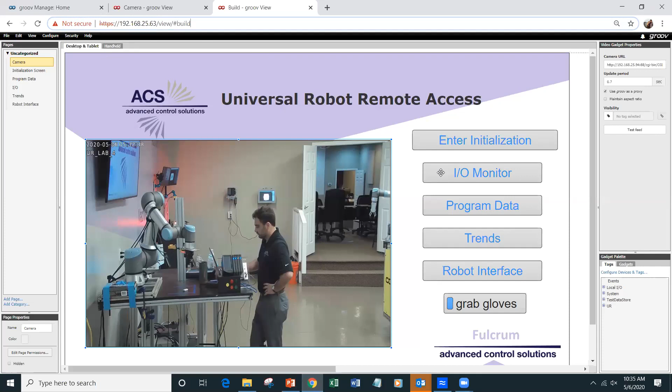So I am going to go into a web browser. I mentioned earlier this is web-based, so this groov Epic is on this IP address on our local network. So I'm able to log in and see my interface just by opening a web browser and going to this address. So let's say I want to go into the initialization screen.

Here I have pretty much all of the real-time functionality that would make sense to operate the robot in a traditional industrial environment. So let's say we're getting started from scratch at the start of a shift and we want to run the robot. First I could power off the robot. You can see over here our robot state is 3, so we just powered off the robot here. And I've got the teach pendant sitting next to me right here, so I can see that, yep, the robot is powered off now.

If I wanted to power on the robot, I will send that command. We can see the robot is booting up currently in our indicator there. Now it is idle, so I want to release the brakes.

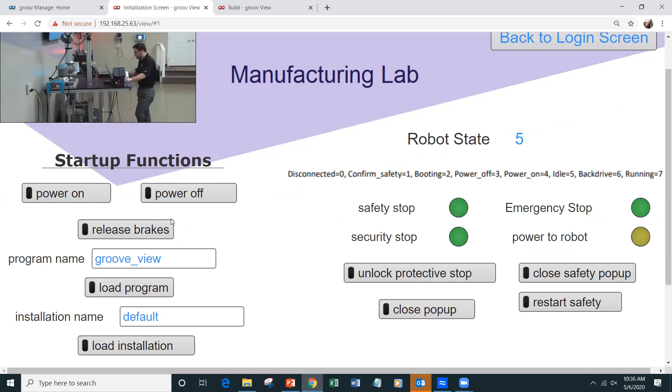The program that we are going to be running today is called groov, so I will just load that program. And here we can play the robot.

As we go to the login screen, we can see the robot running. We'll go into a little bit more fluid video so you guys can see the application running in just a second. But while we're on the interface, I'll show you a few other tabs as the robot's running.

Just working our way down, initially we have the I/O monitor. You can see all of our digital outputs and inputs on the robot controller. These are controlled by this light. So say I want to turn on digital output 5, that light can then come on.

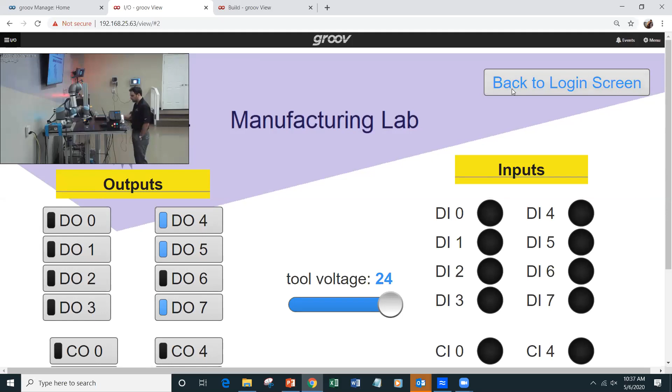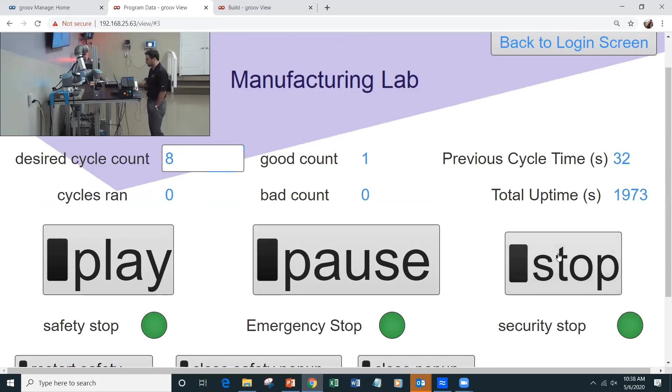Coming back here to our main screen, we could go into program data. Here we can see a lot of the key performance indicators for our current run. Right now the robot is going to run 8 cycles because I told it to run 8 cycles. You can see our previous cycle time. We could stop the robot from this screen.

And we can also use some real-time safety commands to unlock protective stops, restart our safety circuit, or any functionality that would make sense based off of the current situation the robot's in.

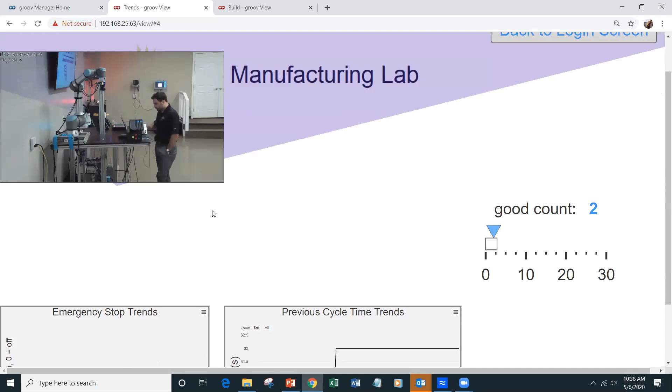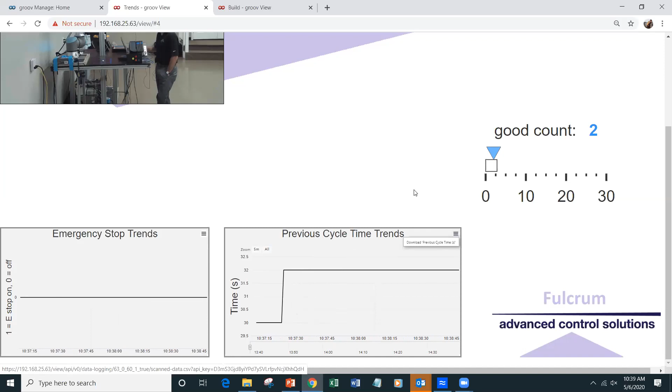Coming over here to trends, we can see some trend data as an example of how you could format some SCADA analysis tools based off of your previous cycle time, the emergency count over a certain amount of time. You could download these files to see it. And we'll go into configuring some of these tools later on.

Again, just showing everything that's on the interface so we can explain the demo. I'm going to allow Kale to take control and share the webcam.

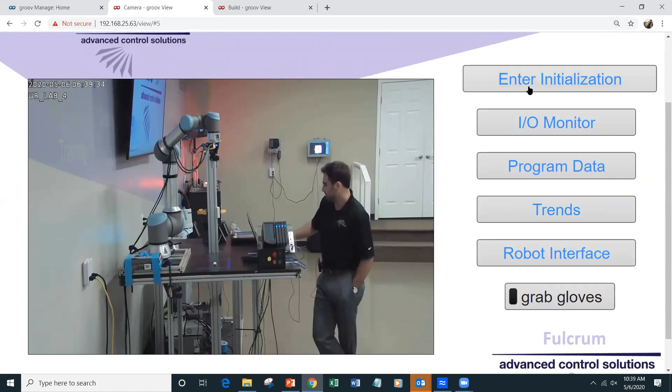Okay, so if I, give me 1 second.

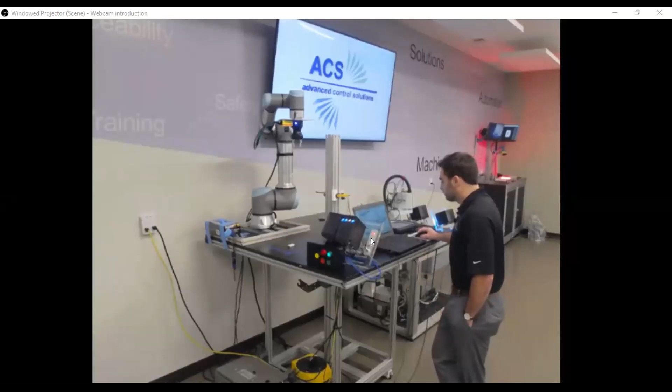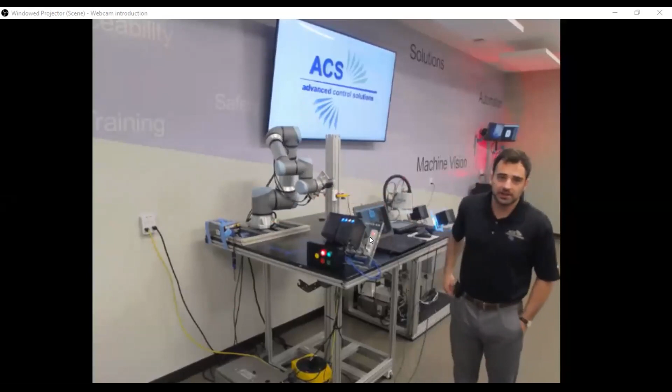All right, so if we go to play our program, what we have going here is a vision guided pick and place. So we have a Cognex In-Sight 7802 camera mounted on the end of the robot arm.

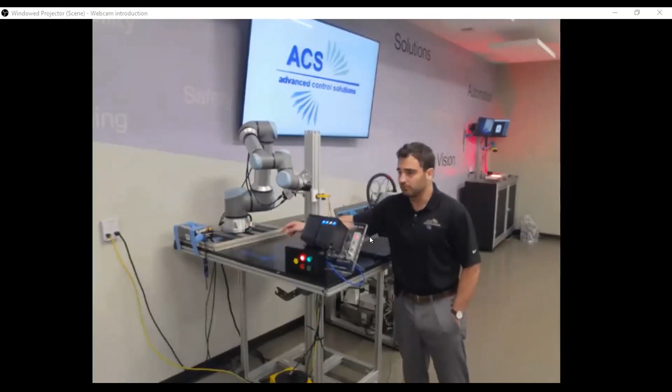That is taking a picture of the USB key in this area, and based off of the angle that the USB key sits at, that coordinate is sent over Ethernet from the camera to the robot, and it will go pick up the USB stick.

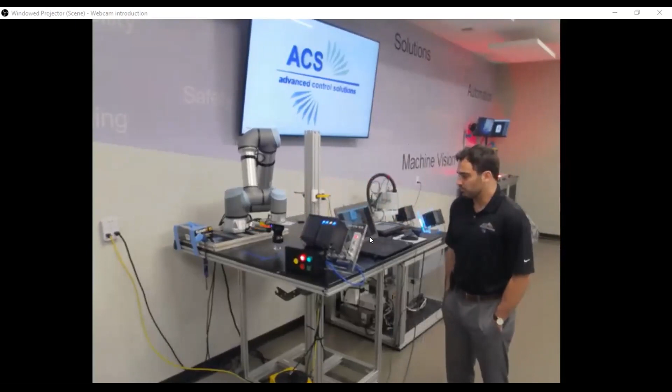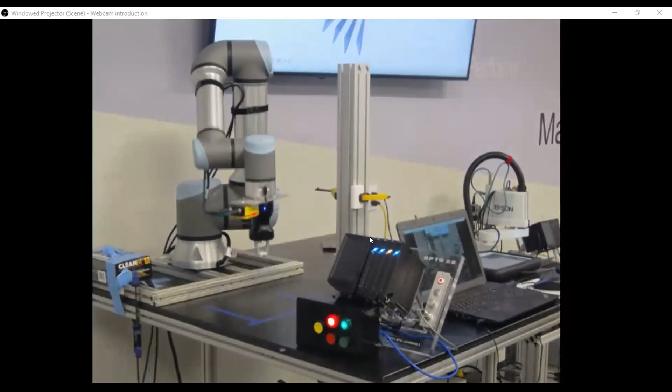We'll wait for the program to run its next cycle just so I can talk through it. We can see here the robot takes the picture, picks the part, and what we're using here is a spiral search routine, which is a built-in add-on from Robotiq's Force

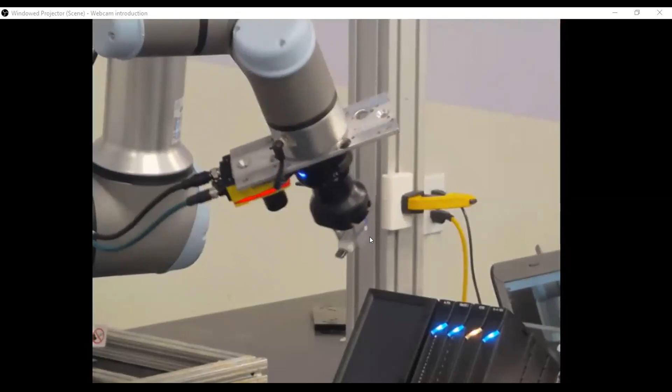Copilot. Essentially, the analogy I like to use is if you've ever inserted your key into a lock and you don't know exactly where the hole in that lock may be, the robot essentially is looking for a drop in force to know that it has inserted the key.

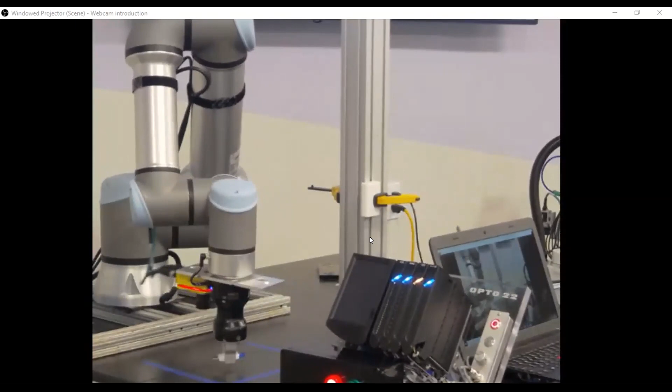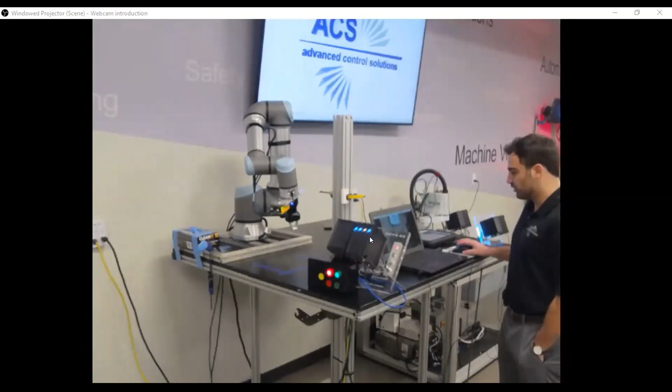So using force, we insert the USB key into the dongle, and then the robot runs a random second generator to rotate around in the area and drop off the USB key after it has run for that specified amount of time.

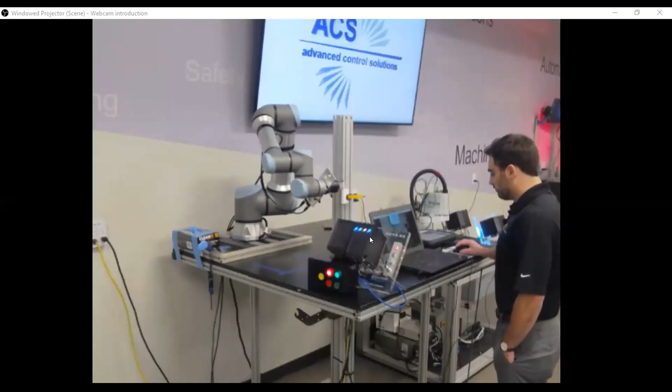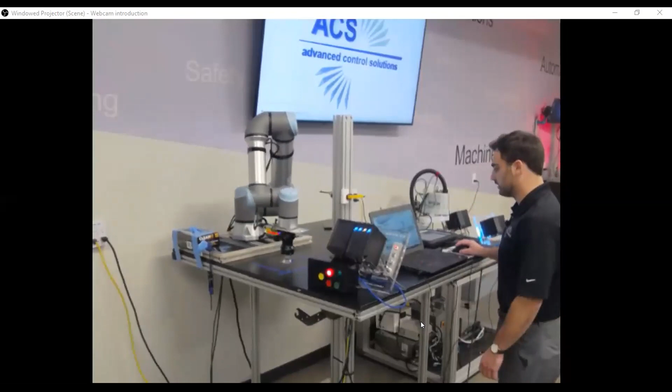So if I come back into my interface, I know you guys can't see my screen, but I'm just going to run one other demo real quick. So I'm going to stop the robot, and I am going to run another demo to potentially pick gloves up.

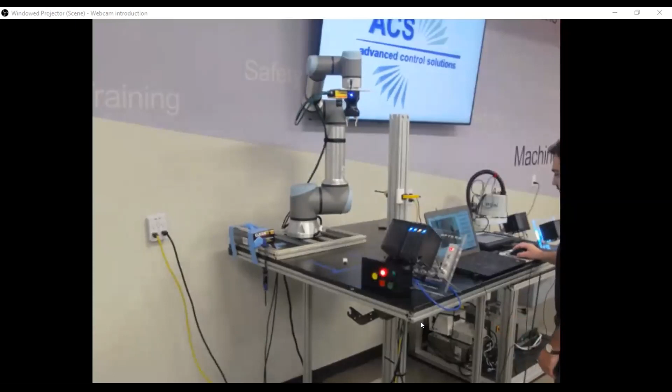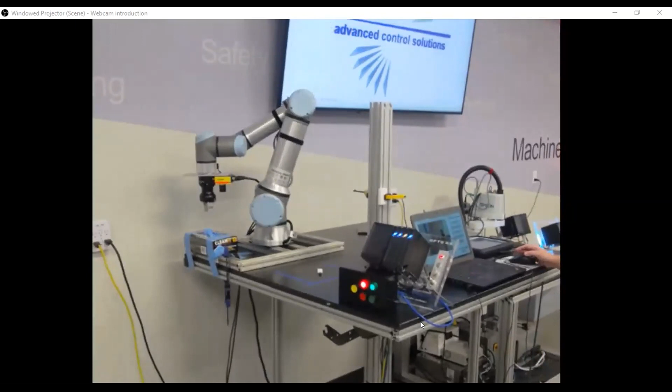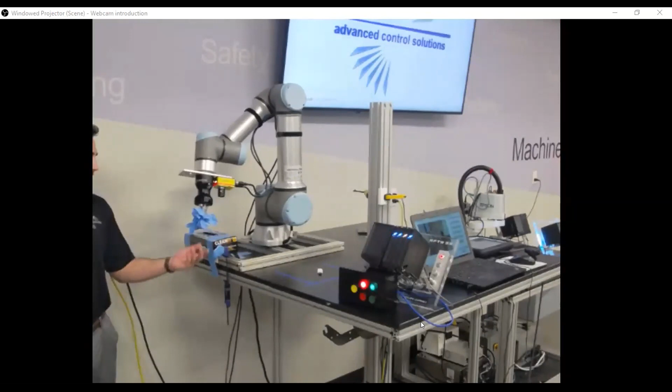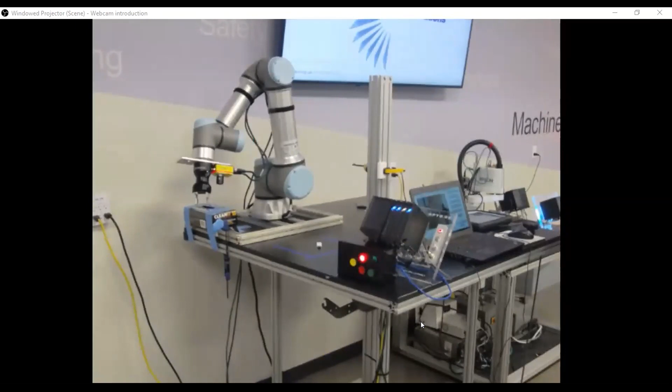There is also the ability on this interface to go between multiple programs. So I have now told the program, in the spirit of COVID-19, to come over here to this box of gloves, apply force downward until it feels the gloves, pick them out, come over here until it feels my hand, and then release the gloves. So an example of how you can go back and forth between multiple programs, all from the remote interface.

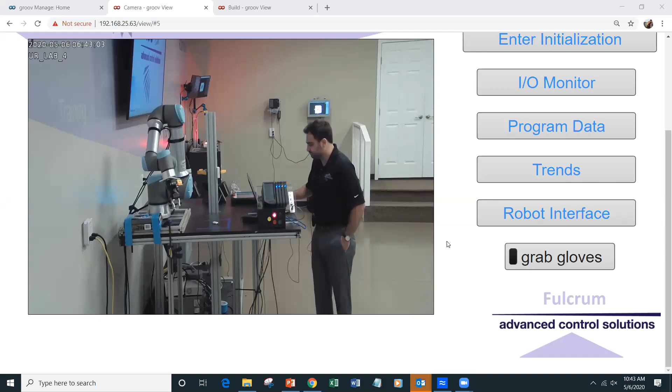Again, if anybody has any questions at any point, please feel free to post them in the chat or just raise your hand. You can see back on the interface, here's the grab gloves button just down here that I clicked, and then the robot ran the other program.

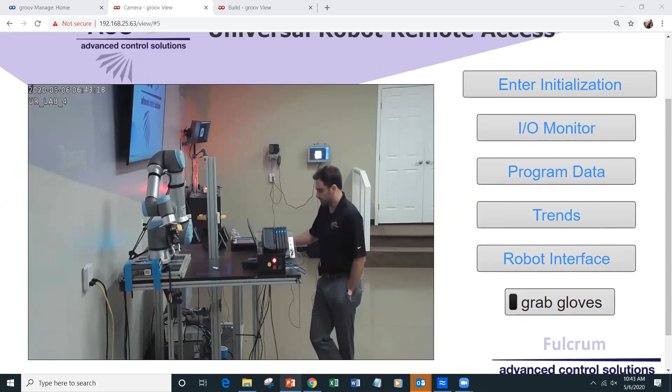So back to our hardware overview. I mentioned very briefly that we are utilizing the Groov Epic controller. The EPIC stands for Edge Programmable Industrial Controller. The Edge really provides its value in Groov's ability to communicate to at the edge of the plant's network.

So as you need to pull in data from other sources, be that on the web, wherever it may be, variety of industrial equipment, the EPIC is extremely efficient in parsing out data and then communicating to your traditional machines and industrial equipment, but also tying in some more non-traditional hooks like database interaction and a few other functionalities like that.

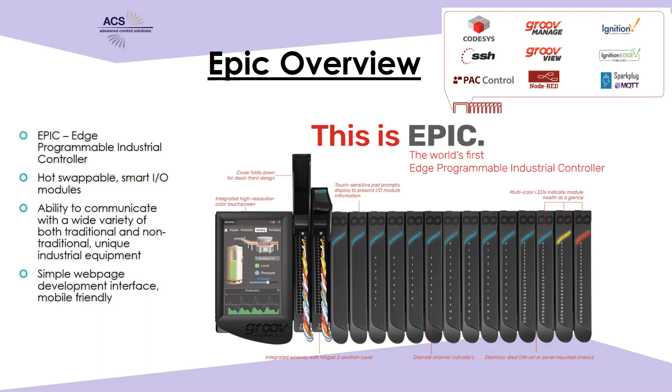Another thing that is unique about the EPIC is the simple web page development interface. It is mobile friendly, and we're going to spend some time a little bit later going into the interface we just showed and showing how some of those buttons and gadgets are configured.

A brief overview on the arm. Again, this is a very 30,000 foot view of the collaborative robot in the EPIC system. The UR robot has embedded force sensing, which makes it inherently safe. This embedded force sensing also allows us the option to go over some more difficult applications, like the USB insertion we just showed, potentially picking up those gloves. It unlocks and simplifies a lot of these applications that with a traditional robot, moving between fixed positions, would be close to impossible to program.

Another major differentiator of the universal collaborative robot from a lot of other traditional robots out there is the intuitive programming environment. That is the Polyscope interface that is running locally on the UR controller. It is a visual flowchart-based programming environment that programmers of all levels are really able to pick up quickly.

Another thing you get without the necessity for safety guarding is the ability to flexibly deploy these robots as it makes sense on a given day. That's where this interface makes a lot of sense, as you need to change over robot programs, you need to change installation. It's just a matter of physically moving the robot, loading in the right configuration settings, which we can do remotely, and then hitting play.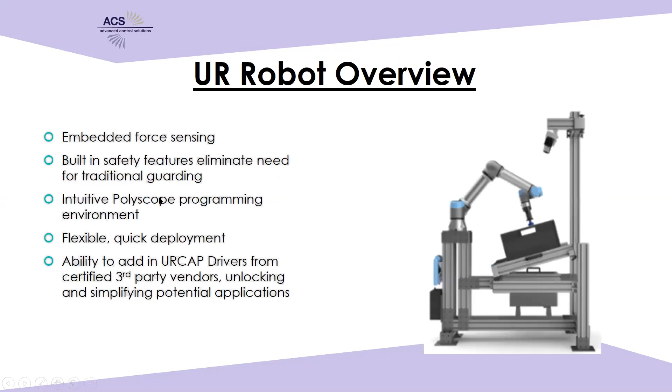So coming back over here to Node-RED, I mentioned earlier this is kind of what we are running on the groov EPIC controller for sending these commands to the dashboard server. Node-RED is an open source coding toolkit primarily aimed at developing IIoT applications. It does a really great job of pulling in data from multiple non-traditional sources and making a decision.

Another thing with Node-RED is it's visual and flowchart based, so you're not looking at a blank screen and having to know structured text like you would in C# or Python or something. It's basically a flowchart, so if you've ever charted a process flow, it's similar to that. Also, it uses JSON tags for formatting and storing data, if you're familiar with JSON tags.

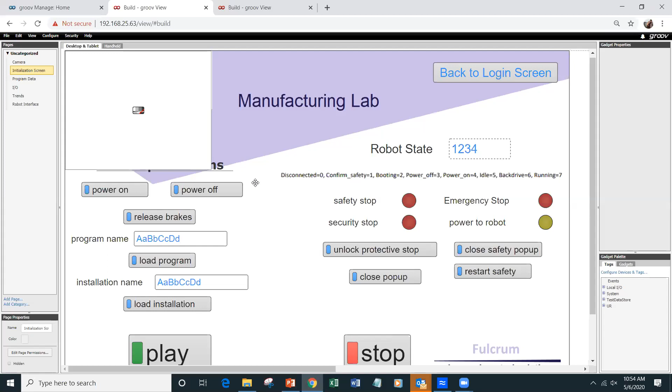So I'm going to go back to our interface and just go over a brief example of how we would add in a tag or a gadget. I can go to my initialization screen, and it looks like there is a button blatantly missing there -- we need a pause button. So if I come over here and switch to my build mode, this is essentially where you could format how all the icons look on your screen.

So I want to add in a pause button. If I come down here to my gadgets and look at pause, I can click on pause, and then I want to add in a button. I'll click on button, just put it in there. Maybe we want to make it a little bigger. Now we have a pause button. Maybe we want to say when it's on, it's yellow, so we can put yellow for pause. And as simple as that, we now have a pause button.

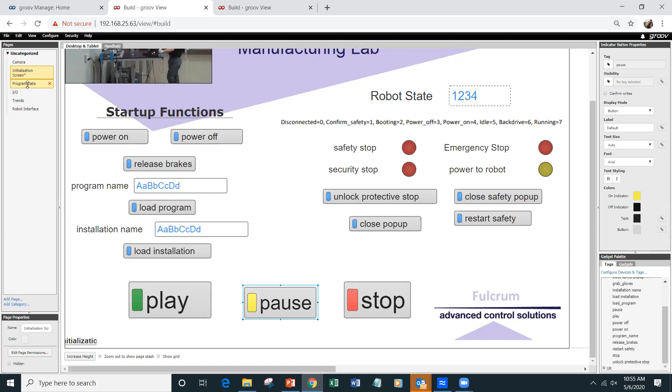A couple other examples of gadgets that may make sense -- if I come over here to my trends, perhaps you want to see the uptime, how much the robot has been running over the past few hours. So in my gadgets, I have a Boolean that is tied to program running.

So if I click on program running, I just want to add in a trend. I'll drag that chart, put it in here, and put the title of the chart. As you can see over here on the right panel, that's where you configure a lot of the specifics for that gadget, so we'll call it uptime.

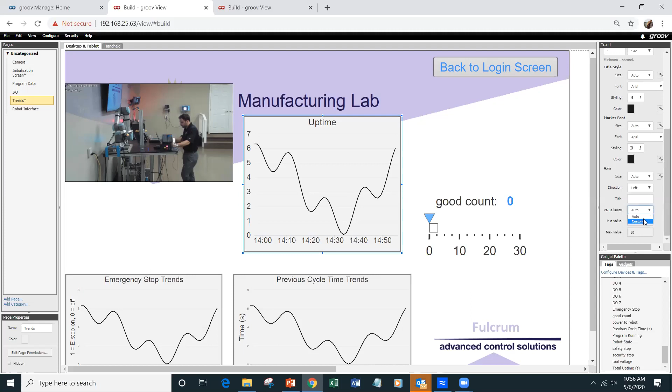Let's say we want to look at a period of the past 3 hours, and it's only going to be between 0 and 1 -- 1 being on, 0 being not running. So I'll make the maximum value 1. We could drag this around, maybe make it a little bigger.

And so now we should have 2 more gadgets in our interface. If we want to test to see if this worked, I'll just hit Save All Changes and switch to Groov View. So I can go back to my login screen.

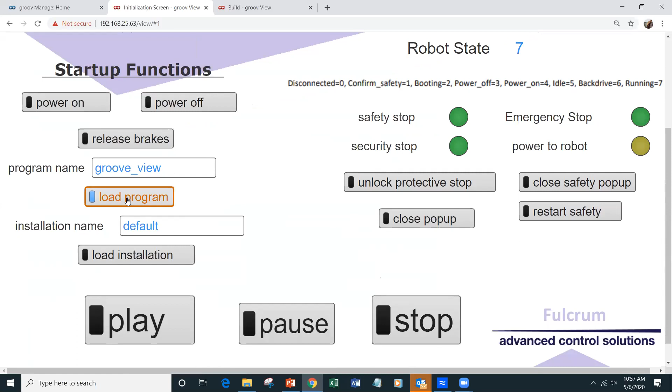I want to go to our initialization screen. We'll load the Groove View program again, and then we want to play the program.

The robot's moving, so maybe we want to test our pause button. I just clicked pause and that worked. The robot just paused there.

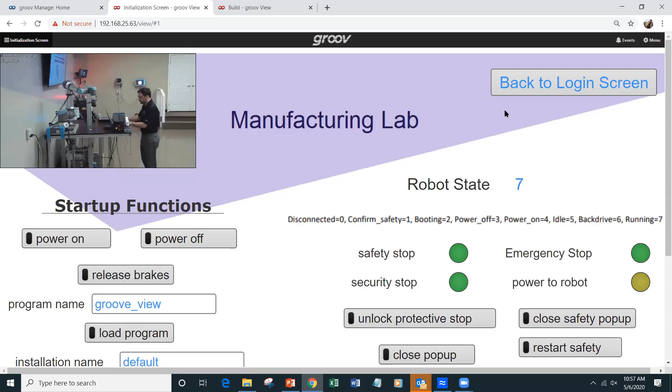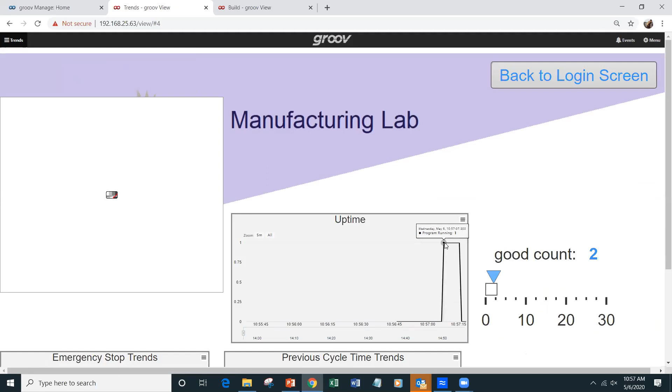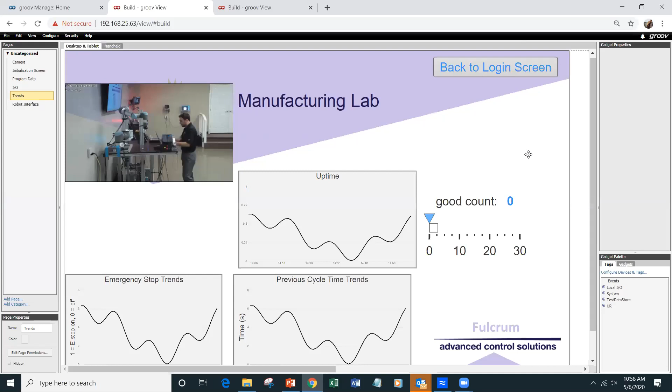We should have some data in our trends too, so let's look at our uptime chart. Right here you can see the program started running at this time and ran for that set amount of time until it stopped. So as you can see, pretty user-friendly and intuitive in how you add those gadgets in.

One other thing, maybe we've got a scaler here for our good count. Maybe we want to add a scaler in for our bad count. Same process: go down here to look at our bad count variable. I'll click on it. What do we want? We'll have a range indicator for our bad count.

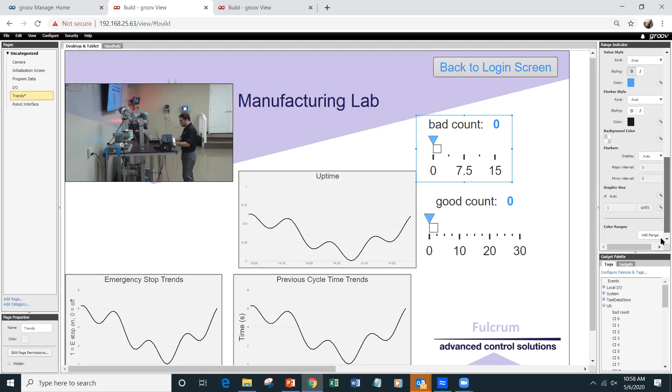Click on my bad count. Maybe we want 15 to be our maximum bad count, and we don't really need any decimal points, so I can take that precision down to 0. And if we save, we now have a bad count indicator.

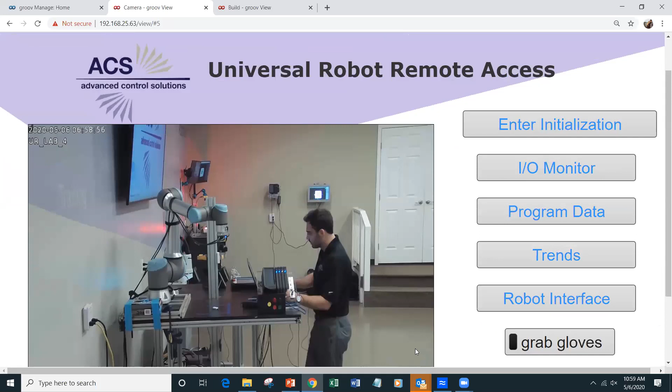So that is just a brief overview of how you can add some gadgets in and operate the interface that we showed earlier. So just to wrap everything up before we get to some questions, I tried to boil down some of the major features that you get in this remote HMI that you wouldn't get through just running the robot locally.

So one of the big ones is real-time SCADA analysis. For uptime, emergency stop trends, cycle time trends over any period of time, it's fairly easy to map that data out and download it as you see fit.

Another thing I have here is program-specific data. We are not limited to the data that we're showing here. If there are any other key performance indicators for the robot that you would like to monitor, we've got available registers to put that data and display it on this interface.

You get a real-time video that is based in the web page, so you can see an indicator, as you saw. This is easily scalable for fleets of robots.

We're just showing this with one robot today, but it's just a matter of copy and pasting and putting a different robot on different pages. Then you could potentially send commands to a fleet of robots or select a robot from the fleet and send commands directly to that.

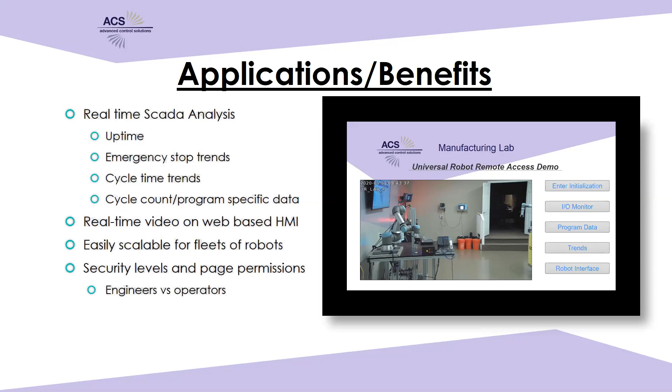But then you can also have a screen with more limited privileges for operators that wouldn't be able to edit some of these configurations, and they'd just be able to operate, run the robot. Maybe you have another permission level for some type of plant manager or production manager that is just more concerned about the uptime and the data being generated on the robot. That's an option as well.

Mentioned earlier, this interface is extremely customizable. So although we have the ACS logo and the watermark on our screens, you could customize this to whatever company logo you'd like to show.

You have the ability to change the robot program and installation file remotely. So as that flexibility concept comes more into play, this really simplifies some of that changeover process.

Another thing that you have in this interface that no other option other than dashboard server commands gives you is the ability to unlock a protective stop or clear a safety pop-up. If the robot did come into contact with something, other than physically going to the teach pendant and enabling the robot hitting play, the dashboard server is the only other option to run the robot.

It's a user-friendly interactive web page that functions as your HMI, so it's as simple as getting a tablet with a browser and mounting that wherever. There's no other complex wiring or configuration for your HMI.

And then finally, kind of a blanket statement, there is the option to tie into wide-reaching other industrial equipment because of the Epic controller's ability to communicate with a wide range of devices and structure that logic accordingly.

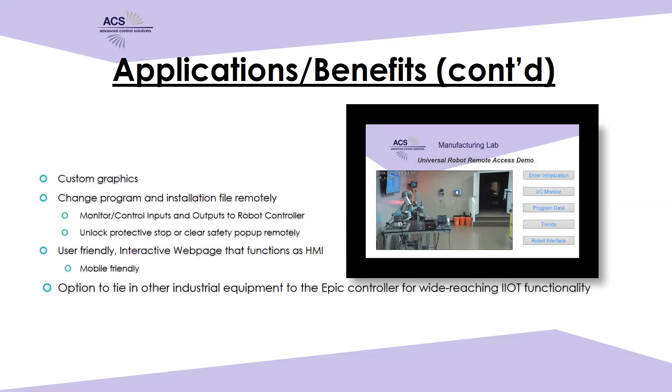So that is pretty much all I had. I'm going to go back to Kale and see if we have any additional questions.

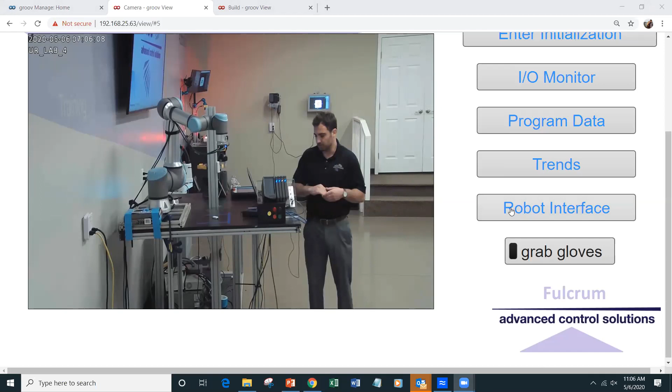So, can you show it using the UR simulator? If you tied the Epic to an Ethernet connection on your laptop running the simulator, all the Modbus server and dashboard server commands should still function as you'd expect. It's just a matter of configuring the robot in the simulator the same way we have here. But yeah, that should be an option to get an explanation of what the HMI screens would look like, and how you could customize that depending on the end user.

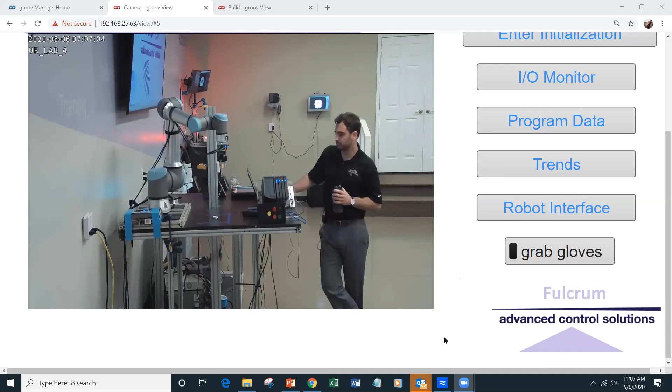Is the controls built into the Epic, or was it an interface developed by ACS? It's a combination. We're definitely using the Epic, using its IoT capabilities with the Node-RED structure that's available. But ACS has developed the custom engineering to map the necessary communications between the UR and the Epic, to get those tags, tag structure, and background programming done, making a more finished product so you can immediately begin developing rather than starting from scratch. So it's a joint effort of the two, but the actual UR interface is an ACS product.

The other question we had: what are edge-based controllers and how are they different from a PLC? In very basic terms, a PLC, a programmable logic controller, does an excellent job handling IO status to turn things on and off, monitor IO bits at very high speeds, and perform very high precision logical instructions. The edge-based controller we're talking about is a device meant to live on the edge of your network, closer to the valves, actuators, and sensors, to bring data in as close to the edge as possible, to then take advantage of the next generation of IoT communications—be it Node-RED for command and control here, or as we get to in other classes, things such as an MQTT server—so data can be shared without violating a firewall or opening your network up to a hacker or infiltration, to get data into and out of a cloud-based server or remote home office without violating your firewall integrity.

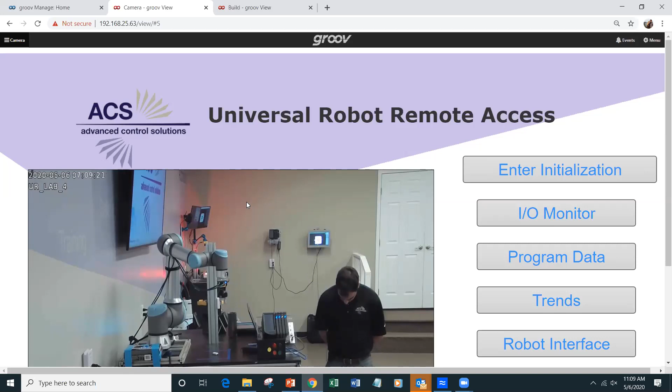So your Siemens, your Schneiders, your Allen Bradleys of the world communicate via the OPC tags, and we're able to share data into and out of those systems much more seamlessly and easily to do things like the trending analysis and trending graphs Bryant showed, much easier, which we can then send to a mobile device. So being able to have this live closer to the edge of the network, tie in the IoT, communicate to the main PLC, and then communicate out - that's a very rudimentary, layman's definition of the difference between the edge controller versus the traditional PLC.

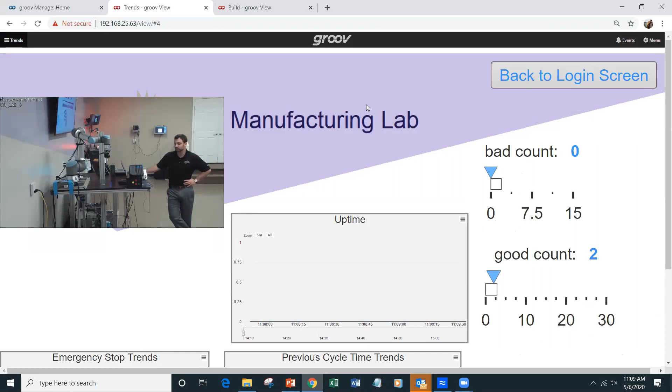All right, I think that's all the questions we have at this point. Bryant, should we switch over to the live camera and show the mobile interface? Sure.

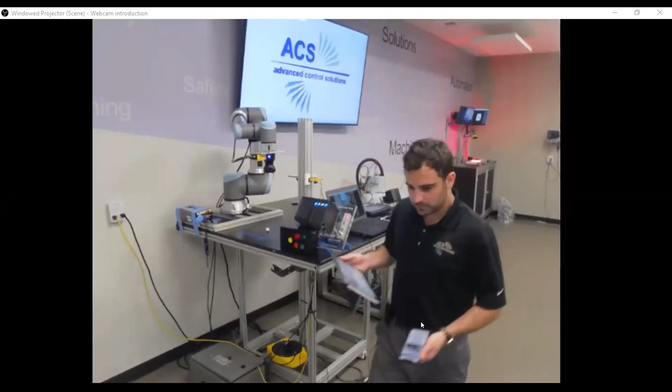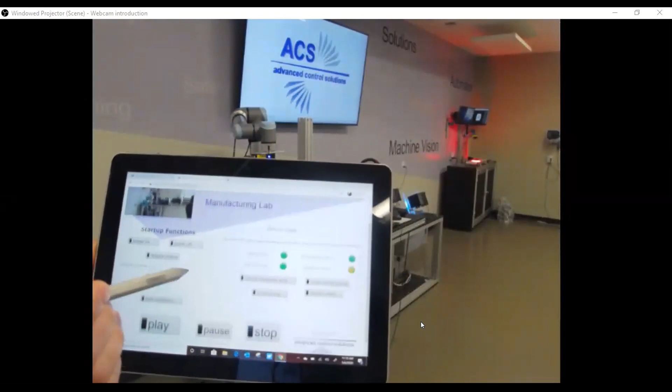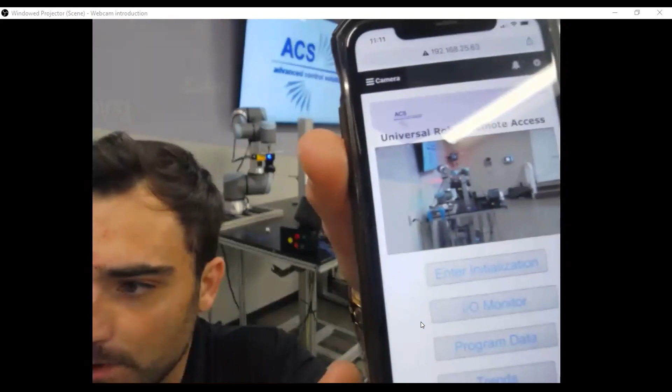We're good. All right, so first I'll show my tablet. As you can see, the screens here are still formatted the same as they would be on my PC. If you remember, when I was in the build mode, I had the desktop and tablet tab here, and I also had the handheld tab over here. So you can see, sorry, it's a little blurry, but you can format the buttons differently. On my phone that I've got right here, you can see the - here we go.

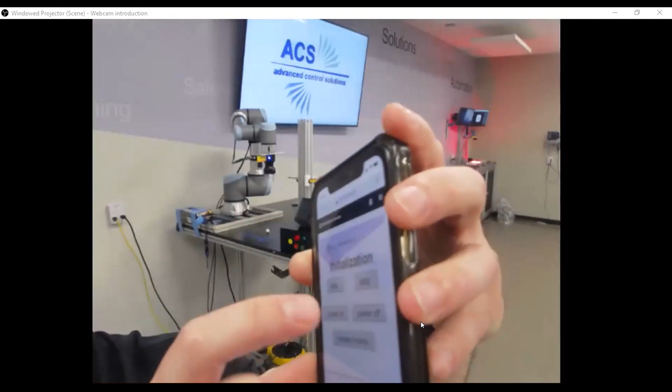You can see this is the initialization screen. We want to go to my initialization and we want to play the robot. So I'll hit play and the robot is playing now, and it's going to insert the USB key.

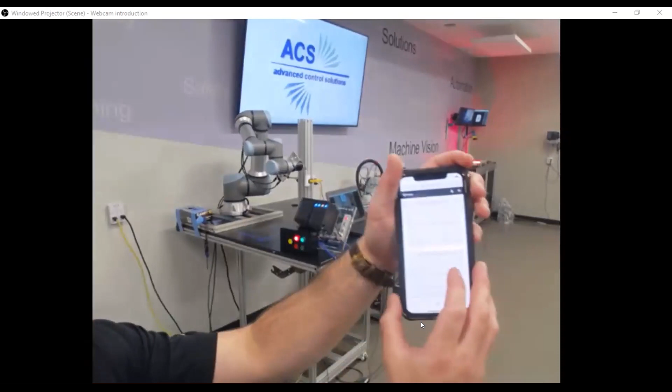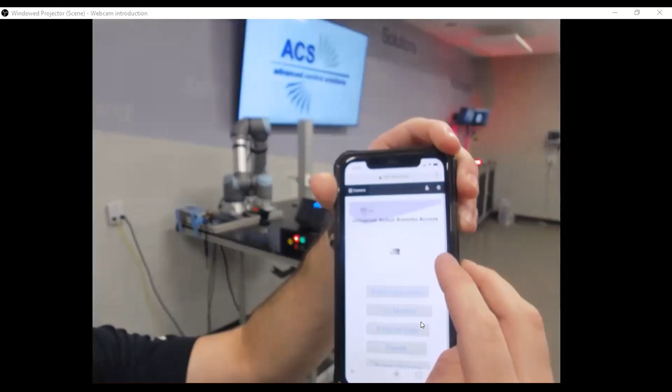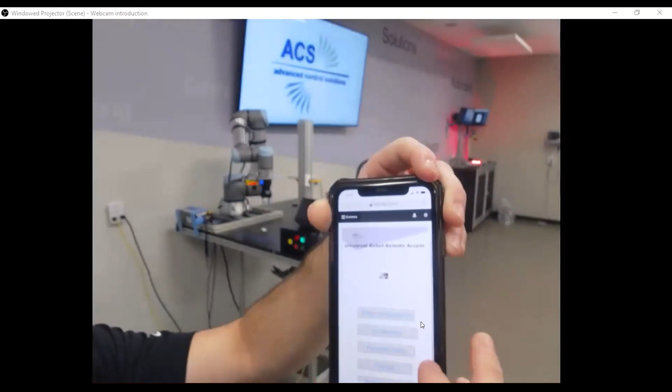As I come over here, I can see my trends on my phone as well. You can see the camera interface. Could also see the I/O here on the phone. Basically everything is shrunk down a little bit to become mobile friendly.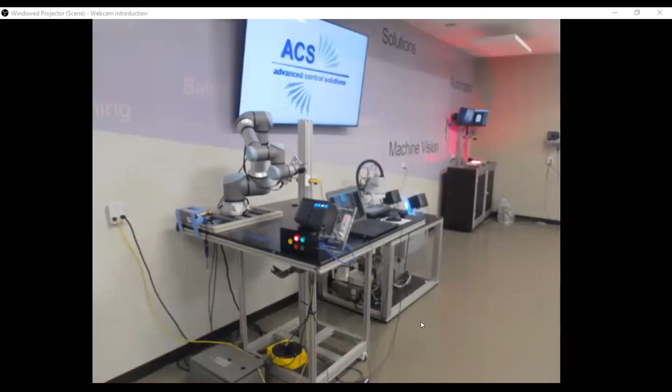I guess while I got my phone, I can go ahead and let the robot finish up and then we can pause it. Does anybody have any questions additionally on some of the interface? Go ahead.

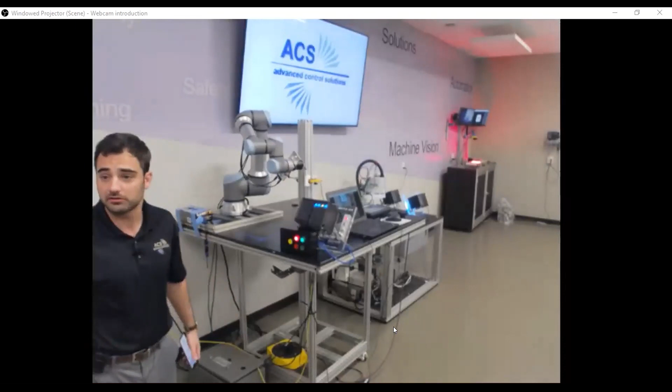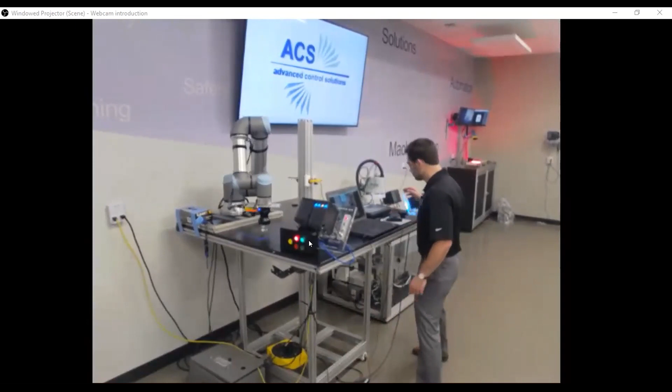All right, I have not seen any other questions come in at this point, so we are wrapping up to the end of our time. If anyone does have a last minute question they want to post today, please do that in the public chat.